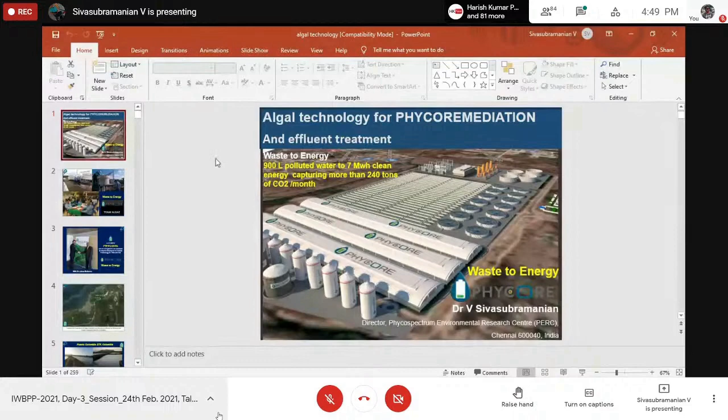We have very recently registered this company, Phycore. PHY refers to Phycospectrum, Chennai, and core refers to Core Biotech, his company, which is a medical company. This man is an MBBS MD in trauma care.

So he has now become an algologist. He is going to submit his PhD in algae from Bogota University within a couple of months, within a month.

The next slide shows a small city called Puerto Colombia, and this is the Caribbean Sea. This connects to Barranquilla, and this goes to Cartagena.

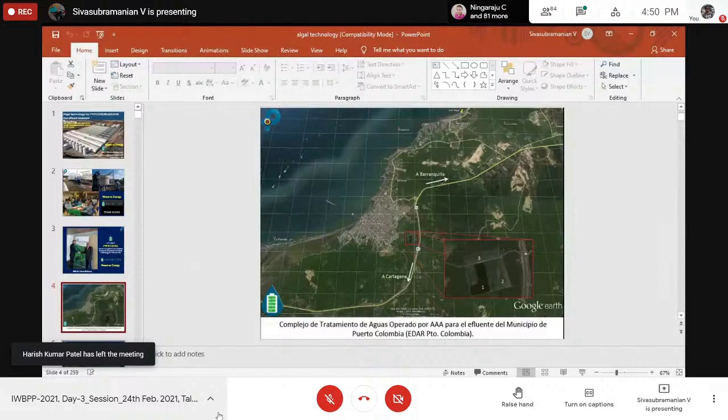We see here a small, enlarged sewage treatment plant that has been given to us. We have started studying the sewage treatment plant, which is not working properly. There are 3 big tanks.

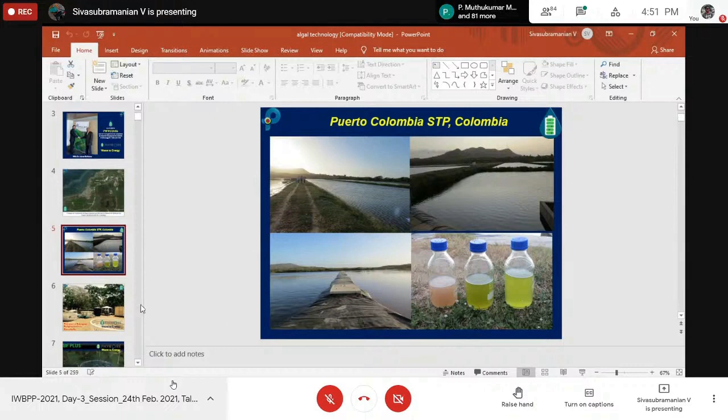If you see the samples collected from the 3 big tanks, they look different because of the algae composition - somewhat reddish and pinkish, dark green, and bluish green. We are now analyzing the wastewater samples and making a consortium to be used for wastewater treatment, which we will be installing very shortly.

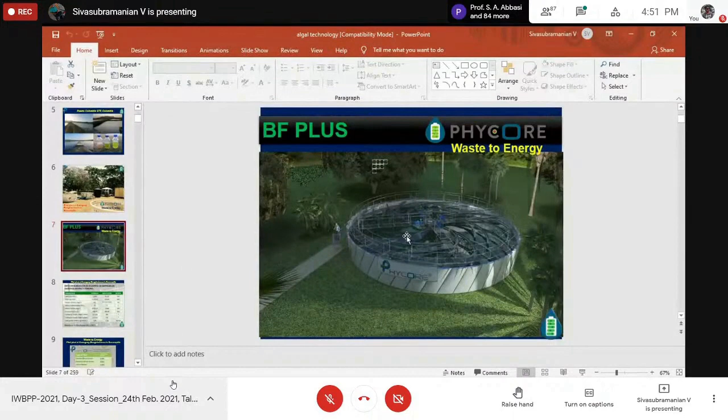This is another project we just completed in a slaughterhouse in Barranquilla, Colombia. Here we see BF Plus, our new treatment facility, or treatment chamber, which we have patented in Colombia. The enlarged version shown here has about 200,000 liters capacity, and we use it to clean the water and also produce biomass, which has a higher calorific value.

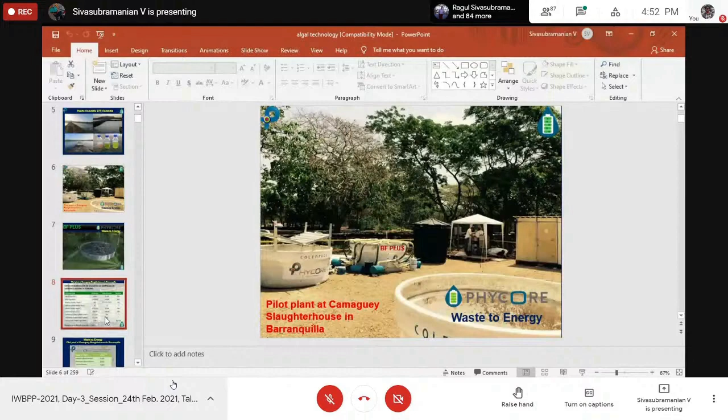In the next slide, you can see that brown coal has about 3.5 kilocalories of calorific value, while the effluent-grown biomass has about 3.8. That means the effluent-grown biomass has a higher calorific value than the brown coal we analyzed in Colombia.

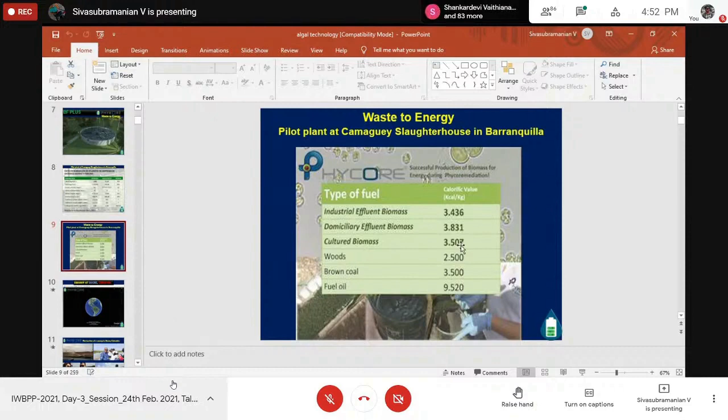Very recently, just before the COVID shutdown, I was in Colombia, and I reached Chennai in the second week of March. Within a week we shut down completely for COVID, but during February and March I was traveling in Colombia.

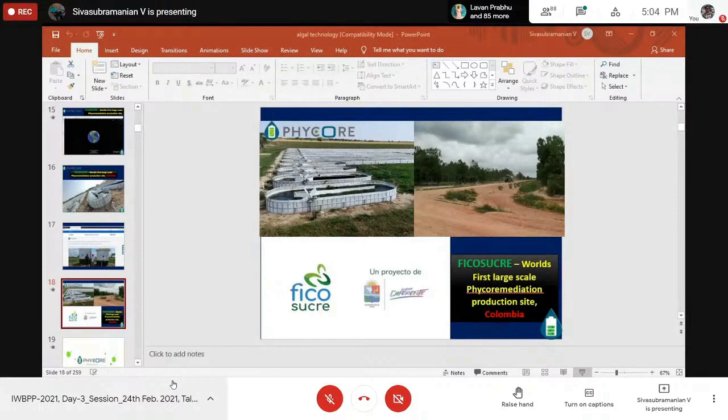And I think right now they may have more cultures than this. And this is another award that we recently received.

I think during August 22nd, 2020, we were sitting in our homes for Corona. So we received online this award, called the Latin American Green Awards 2020, for a project in Sucre, Ficosucre. So we are the winners. In fact, there are about 25 Latin American countries, about 2,000 registrants, and more than 4,000 projects submitted, and we got the award.

So when we got the award, a lot of people started visiting us, like the government people, including mayors and governors. I think last November, one of the governors wanted to meet me, but I couldn't travel to Colombia because of the COVID situation. I think even now the flights are not running.

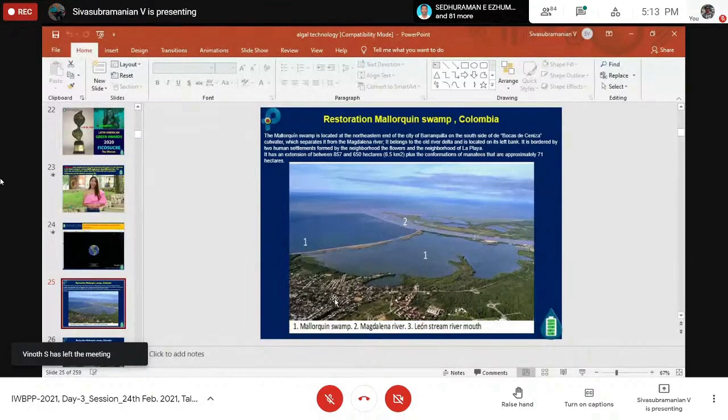And this is another project that we have done in Colombia for the restoration of the swamp. This is the swamp, and number 2 is the Magdalena River that goes into the Caribbean Sea. So the Caribbean Sea, the river, and this swamp. And this is a city, and they want to develop it into a tourist spot. We have done initial studies and also restoration of this big swamp.

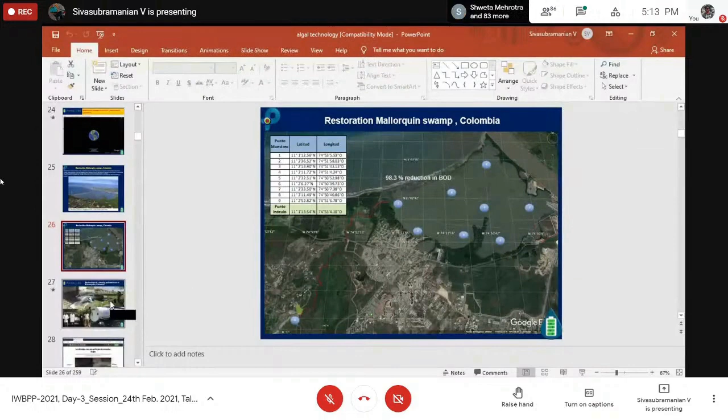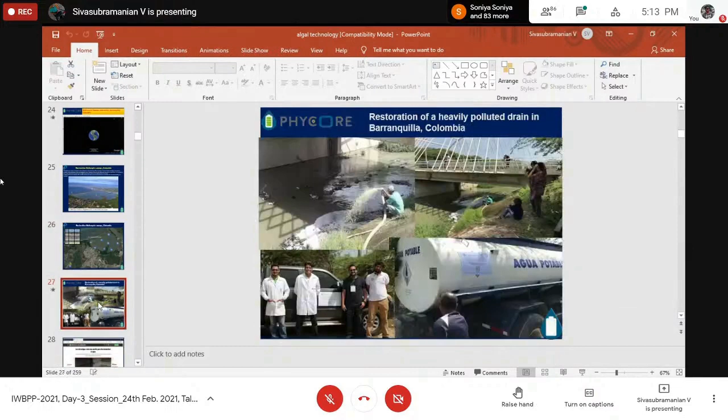You can see here 98.3% reduction in BOD achieved in various spots. We have also treated some of the polluted streams which actually go and dump the wastewater into this Mallorquin swamp. So we have started cleaning that also with our technology.

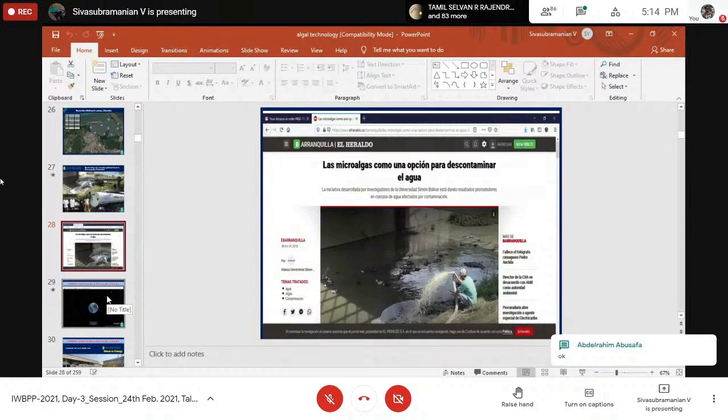And that has actually come in the newspaper. El Heraldo is a major newspaper, like Times Now or Times of India in Colombia. El Heraldo is a big newspaper, and they have put up a news item with maps here about treating the waterway that goes into the Mallorquin swamp.

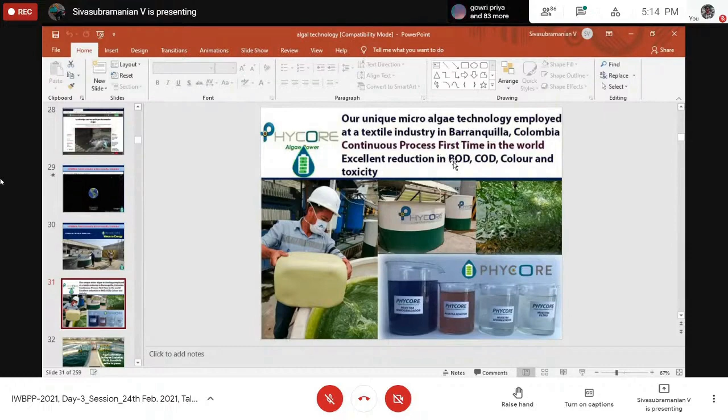So this is another visit I made in Barranquilla. We are doing a project with the Canon textile industry where we put up our pilot there. And the most important thing about the pilot is that it's a continuous process. Normally we do a semi-continuous process, where the effluent... but here it's a continuous process for the first time in the world. And we got excellent reduction in BOD, COD, color, and toxicity.

Skip some of the slides. Yesterday, Dr. Tojin was talking about our Indo-UK project. So whenever we visited, I think 2 times we visited the UK, Plymouth, and then we went to Swansea University and all that. Whenever we go there, we always ask these people to arrange for an industrial visit, because I'm interested in more than a lab, in visiting industry.

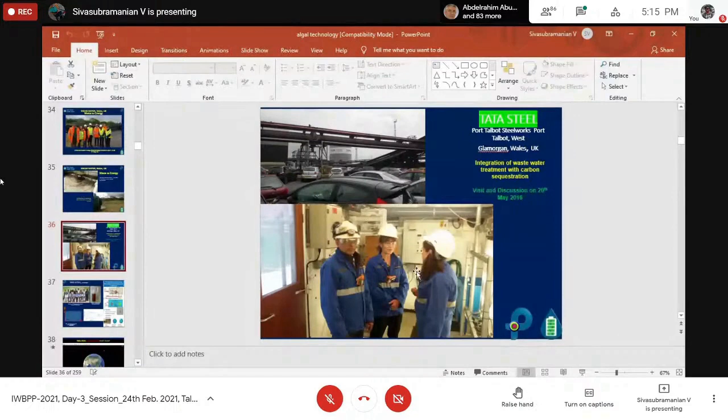And we also visited Tata Steel in the Wales area. I think these 2 ladies who belong to the university, Carol and Dr. Alan, they have put up a big facility for treating carbon dioxide, a flue gas mitigation facility. And we want to put up a facility for treating wastewater there.

So whenever I returned from the UK, within a month, I got a phone call from Tata Steel Jamshedpur. He called me and said, we have a problem with the biological treatment system that was installed in 1972 or 1974, I think. I think they have a problem with color, cyanide, and ammonia removal.

So this is the laboratory treatment we did with the sample obtained from the steel plant, after the initial discussion and final agreement. And you can see within 4 hours, we are able to remove the phenols so that the color is gone, and also able to reduce the cyanide and ammonia to a very low level.

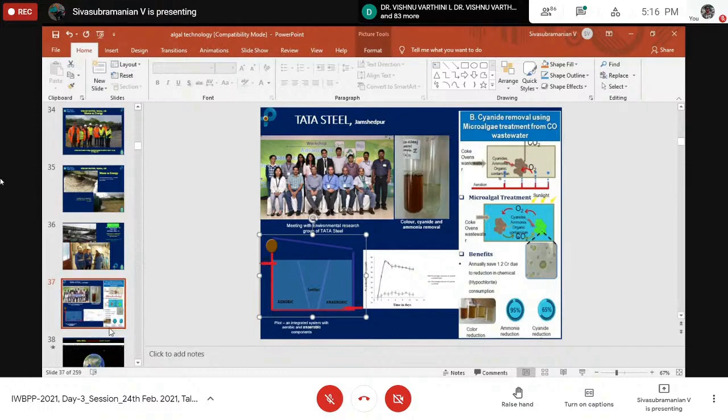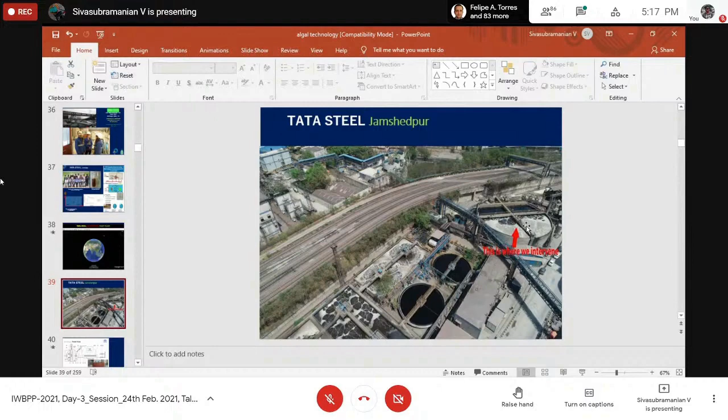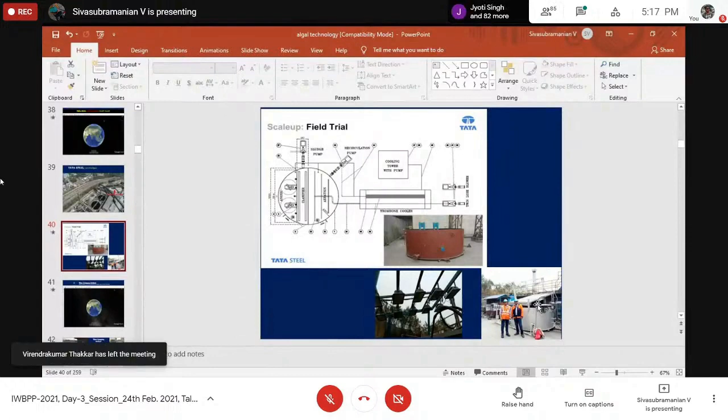We actually added algae along with the bacteria, and that was working very well. We put up a small pilot plant of 8,000 liters. The bigger plant you see here has been reduced to a very small system with all the fittings and pumps and facilities. We also put up LED lamps. This project was complete, and we are now waiting for scaling up.

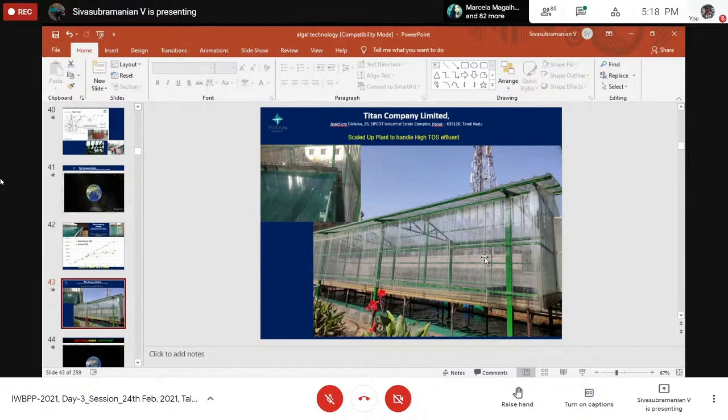This is another 10-ton plant. We have scaled up the plant to handle electroplating wastewater that has about 58,000 TDS. It's very high. When the treatment plant goes up to 65,000 TDS, it brings up color and TDS, and then we evaporate the water without full treatment, ending up in sludge. We put up a huge facility where we are actually treating the wastewater and also evaporating it without sludge formation.

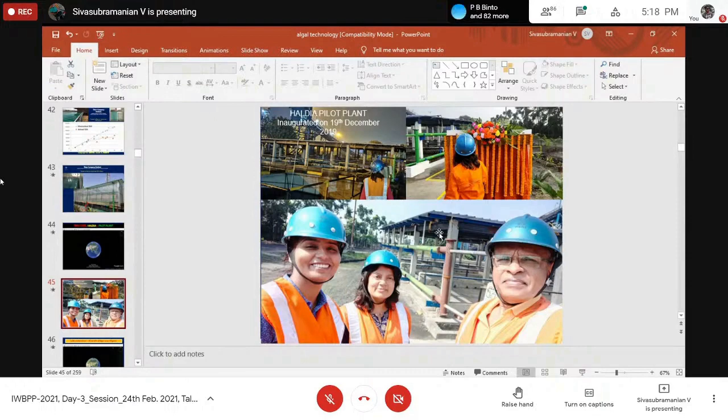A similar facility has been put up in Haldia in West Bengal. Very recently, on 19 December 2019, we put up a 3,000-liter facility there for treating the reject wastewater produced by the Tata Steel facility there.

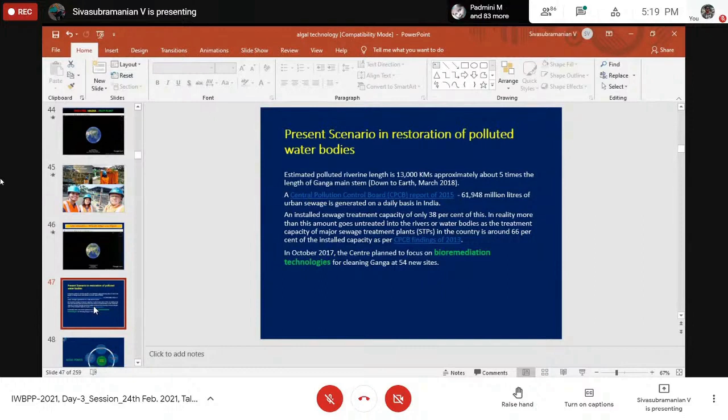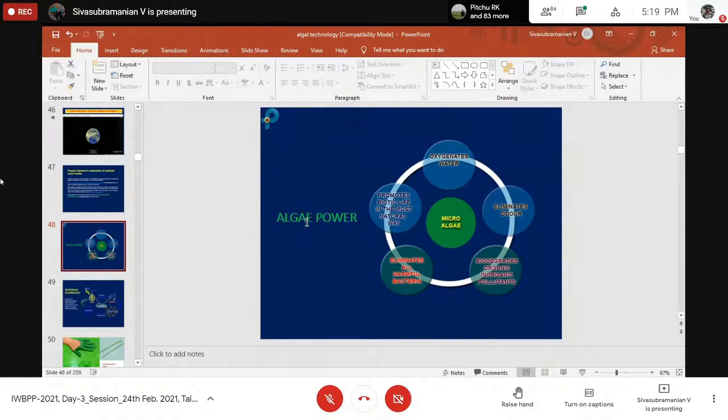Lake restoration is a major project that we have started in India and also in Colombia, where we use algae and the power of algae. I don't want to go into detail, but we have a product called Phycoplus, we call it Phycoplus technology.

Phycoplus is a mixture of organically derived nanotech based micronutrients, trace elements, growth factors, and enzymes. This is added in very small quantities to enhance the growth of algae, which captures light and does photosynthesis, takes care of the nutrients, and releases oxygen. Oxygen is used by aerobic bacteria that act on the organic load and mineralize it, and the minerals are again taken up by the algae.

This helps in faster remediation of polluted lakes, ponds, rivers, and streams. Normally this happens in any water body, but by including Phycoplus, our product, you can enhance the whole process. Instead of taking one month, I think it will take just a week.

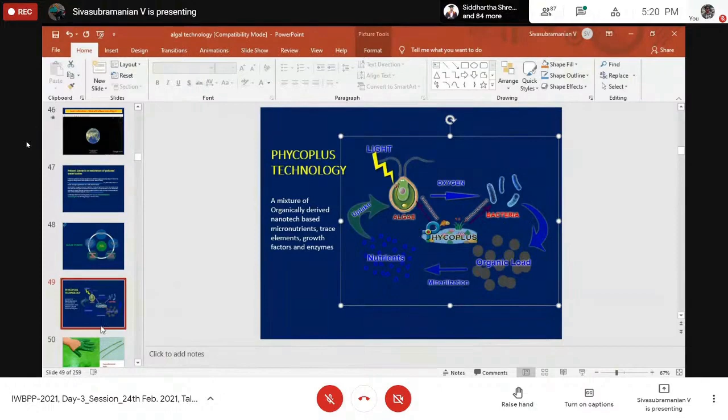This is another project we just started, where we have a problem with cyanobacteria. When we add our product, it interferes because cyanobacteria has the capacity of iron scavenging using siderophores, and iron is taken by the cyanobacteria, meaning it's not available for other algae to grow. Our product interferes with this iron-scavenging siderophore activity, so that the cyanobacteria no longer become dominant and other algae start growing.

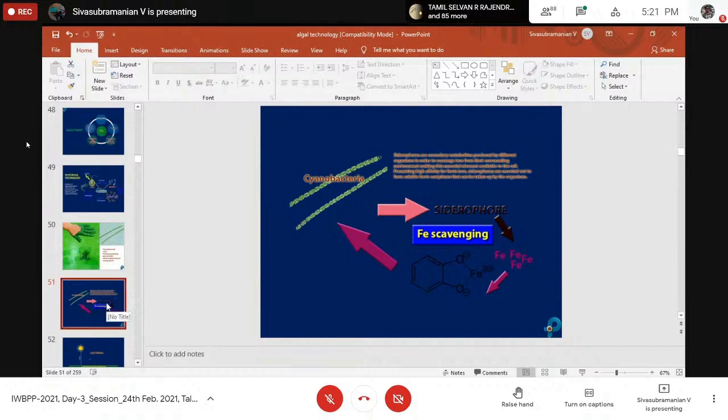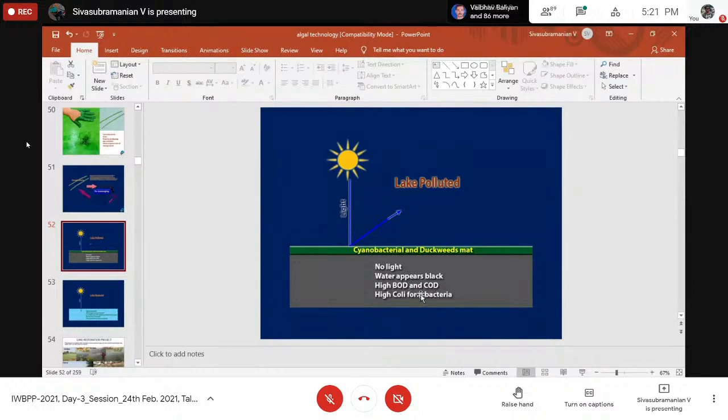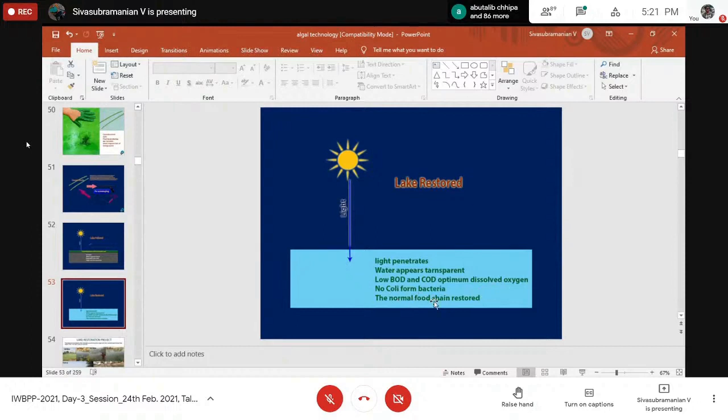Normally in a polluted water body, cyanobacteria advance, completely covering the surface and not allowing light to penetrate. When light is not there, water becomes black with very high COD and BOD, and a lot of coliform bacteria. When we treat the lakes, we remove the cyanobacterial and duckweed mat, so that light penetrates and water appears transparent. COD decreases, dissolved oxygen increases, coliform bacteria is completely removed, and the normal food chain is restored. This is what we do.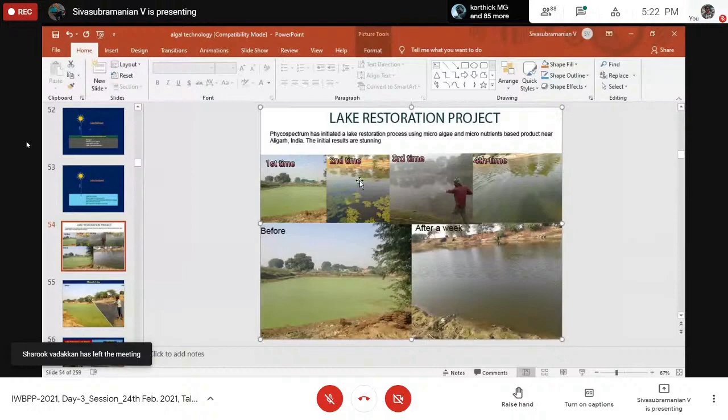We have started restoring lakes, ponds, and rivers in India also. This is the first project we did 2 or 3 years back, a lake near Aligarh, a small village near Aligarh. You can see in the next picture the lake before and after.

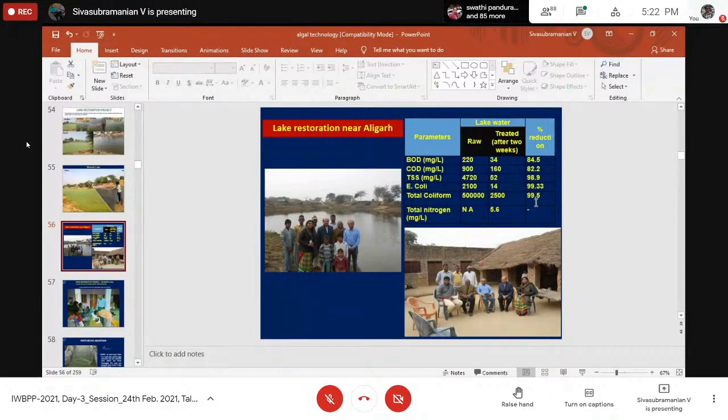You can see it completely covered with algae, cyanobacteria, and weeds. Within a week or so, you can see the complete removal of the covering, so that the water becomes transparent. As the light penetrates, a lot of beneficial algae start growing. You can see the parameters after 2 weeks: BOD and TSS reduced by more than 84 to 98%, E. coli 99% reduction, coliform 99.5% reduction.

This is the starting point of the restoration of wastewater bodies using algae and our phycoremediation. This is another project we did in Jhansi.

Within 2 weeks, we are able to remove and completely clean the water.

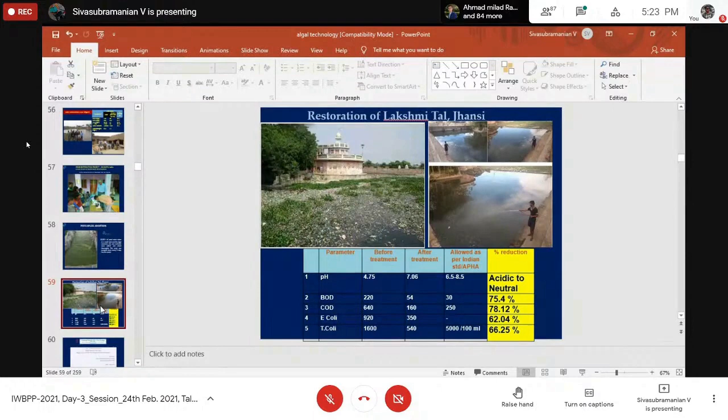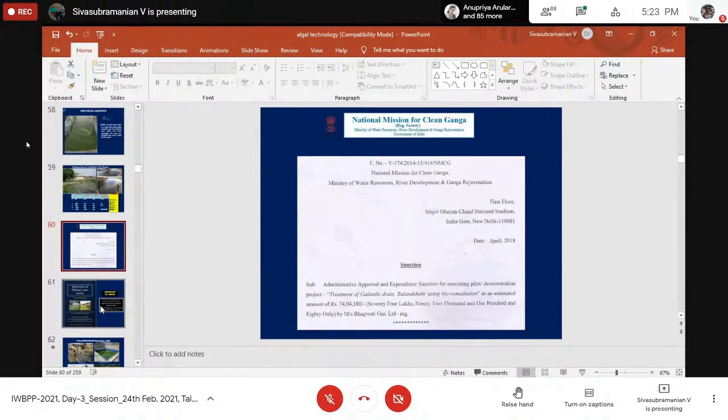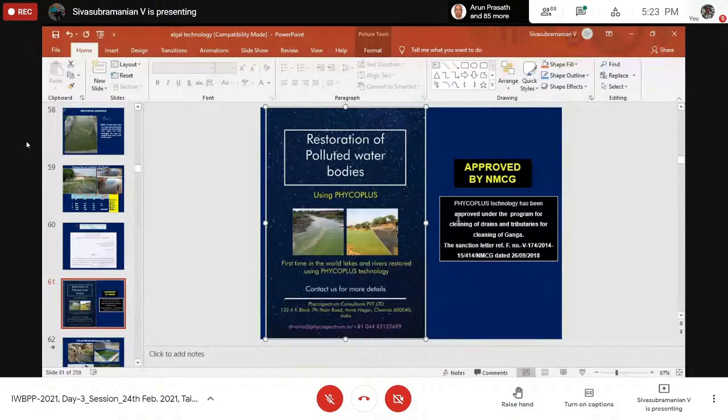National Mission for Clean Ganga gave us a project in April 2018 to restore the Gulaothi drain. This was also approved by NMCG. If you see the NMCG and Central Pollution Board bulletins, they have mentioned our technology called Phycoremediation. So that's a critical success, and this is the project we have done in Gulaothi.

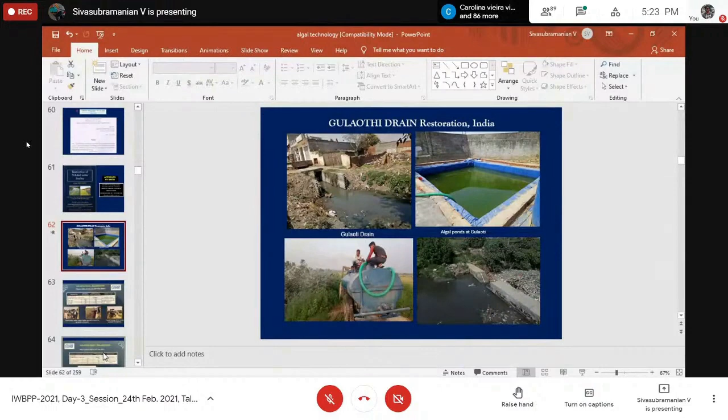Gulaothi actually goes and joins a river called Black River or Kali Nadi. Kali Nadi goes for 135 to 145 kilometers and joins the Ganga. This is one of the projects we undertook 2 or 3 years back.

This is another project we have done in Bulandshahr, and this is a project we completed restoring a polluted water body, I think in Bihar, where fish were dying because of pollution and the absence of oxygen. Within 15 days, we were able to remove the pollutants and make the water transparent. Fish stopped dying, dissolved oxygen raised up to 5.5, and pH raised to 7 from 4. The algal bloom was completely cleared.

This is another project we did in Sitamarhi, Bihar, and these are the pictures of the project. Very recently, I can conclude with this.

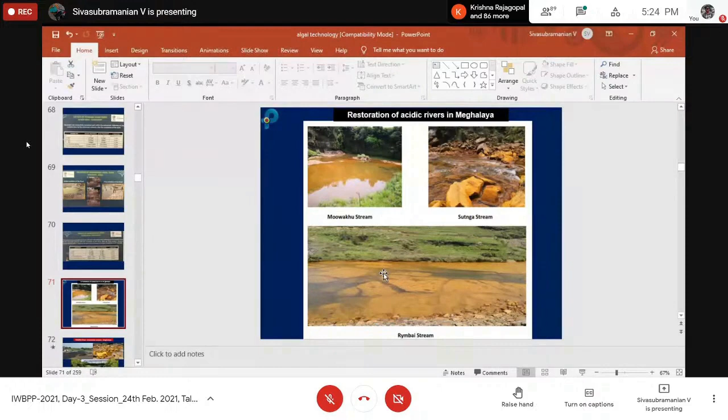Very recently, the Meghalaya government gave us a project to restore a polluted river. There are about 3 major rivers in Meghalaya which have become acidic because of coal mining activity going on there. Suppose you have land, you can mine coal, and during coal mining a lot of sulfuric acid enters the river in several locations. You can see sulfur-coated rocks, and the water becomes transparent because the pH is around 2.5 to 3.5, and nothing grows.

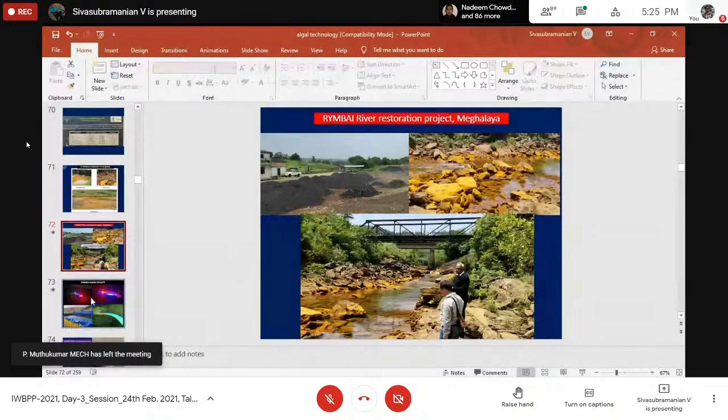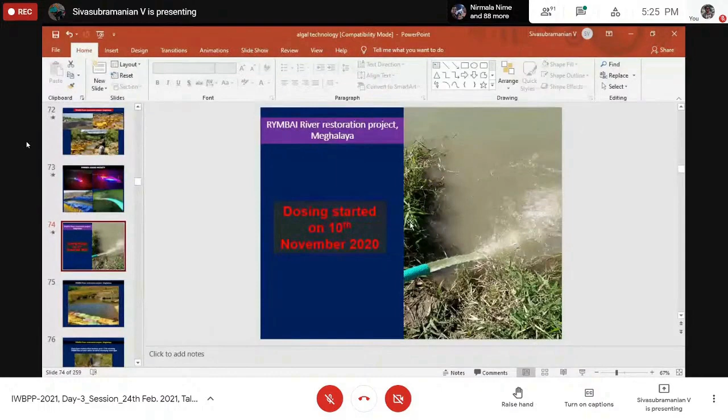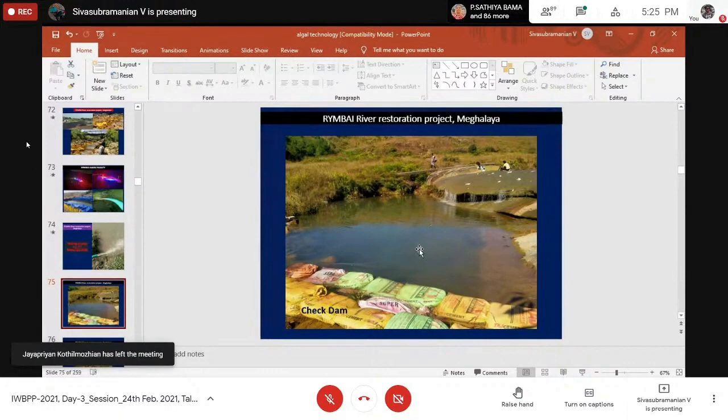So this project has been given to us. We have put up a huge media facility there with LED lights and all that, cleaning up rim by rim. We just started on November 10th, restoring the river. We put up check dams to keep the water stagnant in a few places, so that when we remove algae there, it starts correcting the pH. We have started correcting the pH from 3 to 7 using the check dams.

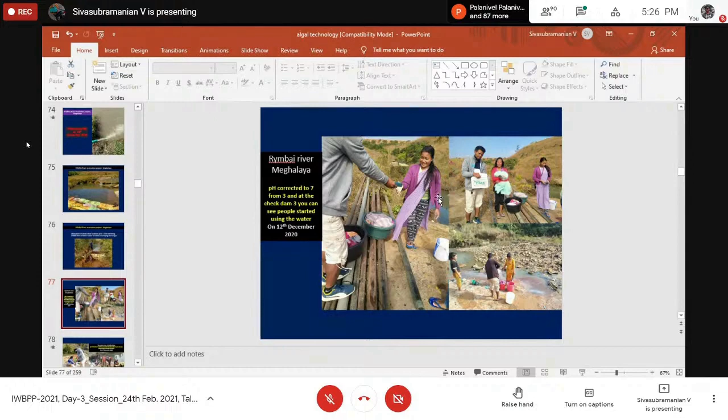On 12th December, this picture was taken, showing the local people before we started restoring. Nobody was coming near the river because it was acidic. Now people have started washing their clothes there. We are supplying them with detergents, with the idea that the detergent will help correct the pH further down the waterway.

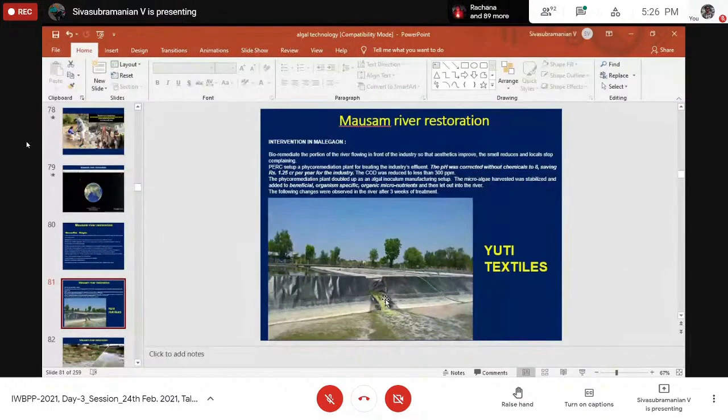We have also done another river restoration project. We signed an agreement with a textile industry that was dumping waste into the river. We treat the textile waste, and then the treated water, along with a lot of algae, is thrown into the river. You can see the results we got.

The upper table shows values before starting treatment, and the lower one after starting treatment, at Dyane, Mausam, and Chandanpuri. Dyane is the zero point. Chandanpuri is about 10 kilometers away from the industry where we do the treatment. After Chandanpuri it joins the big river, so we don't need to go beyond that point, which is after the 10th kilometer.

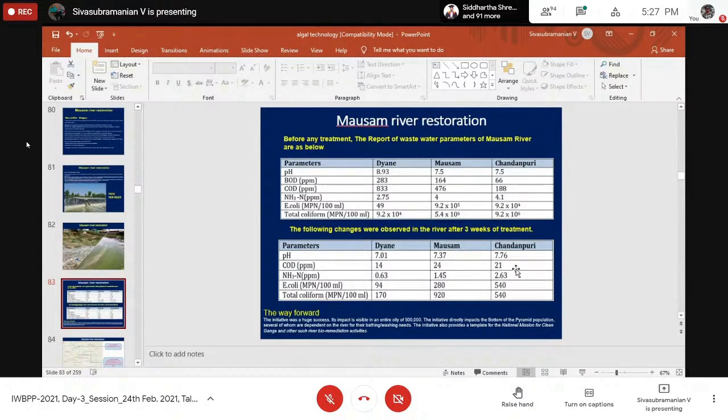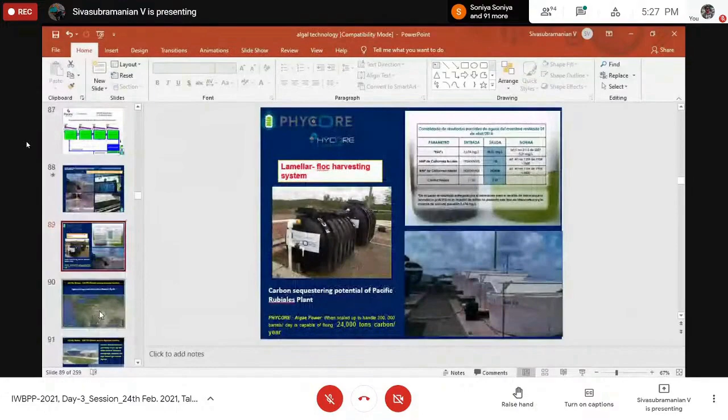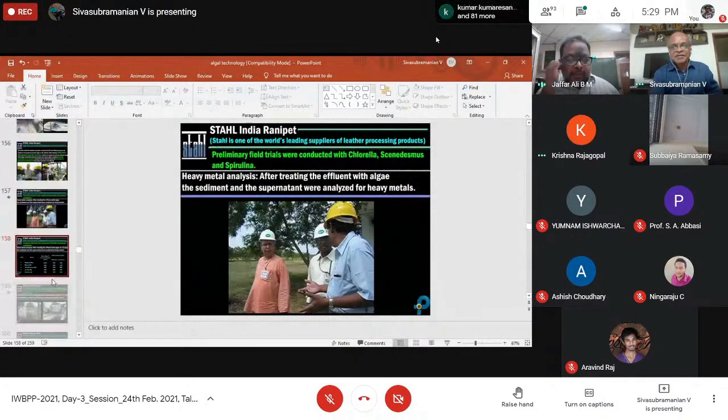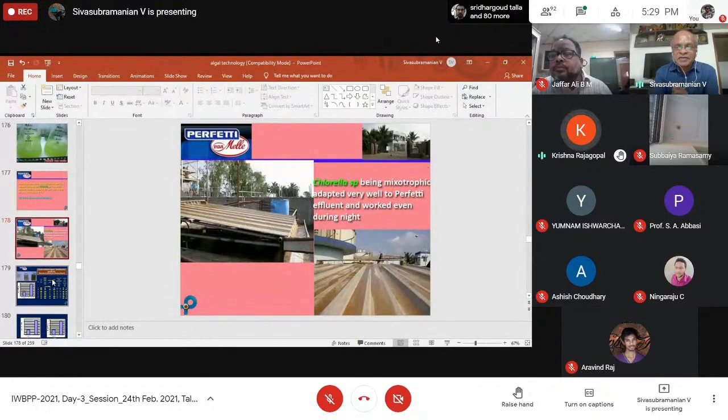Any clarification questions? Please come in. Can I ask a question? Yes sir, please go ahead. Good evening, Dr. Sivasubramanian. Very good talk, and congratulations on taking the risk in places like Colombia with all their social and security problems. I lived a long time in Latin America.

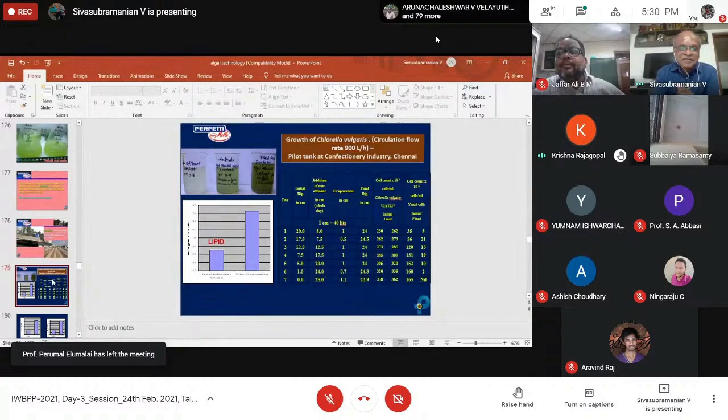My question is related to drinking water. We have our city of Rio de Janeiro, which has treated algae that produces a compound called geosmin. Geosmin has a strong smell, and people don't like it. Some people even say it causes health problems like diarrhea. How do you avoid this production of geosmin by algae?

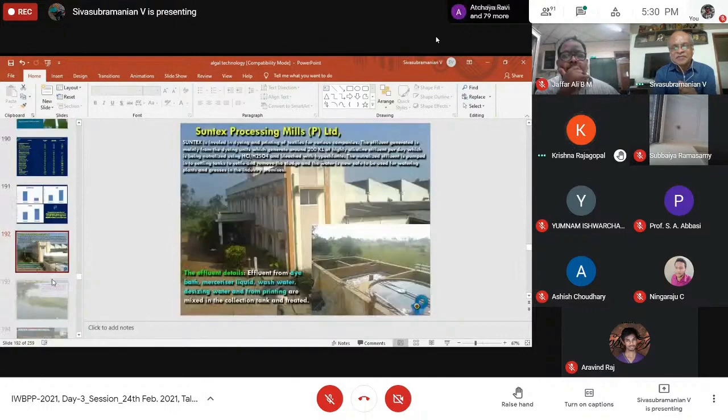Geosmin is the compound I suppose you mean. If not, I can tell you it's an aromatic compound with two benzene rings with OH and CH3 groups. It's a well-known compound produced by algae. I think it's basically due to some contamination with sewage water.

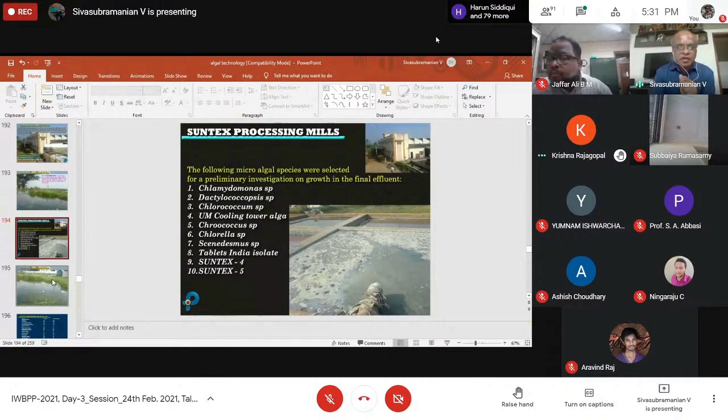Actually, we don't directly deal with drinking water. Whatever we are doing is only wastewater, from industries and also from sewage. I haven't heard of this problem in Colombia as such. Probably in drinking water there may be a problem, but we don't deal with drinking water. We deal with already polluted water bodies. I will try to search the literature on what you're saying and learn about it myself - it's a very interesting question. Although we don't touch drinking water, drinking water eventually becomes wastewater later, right?

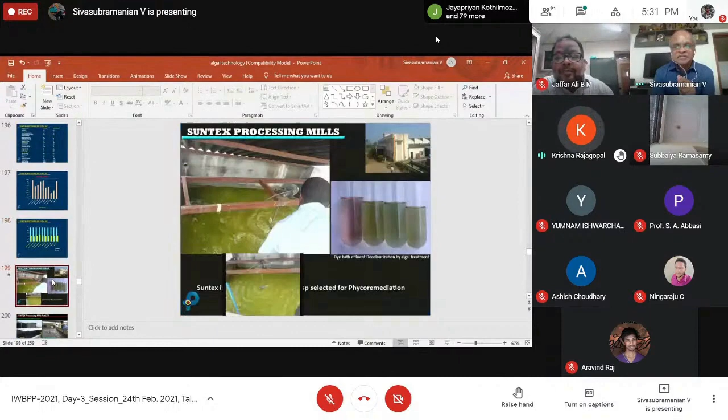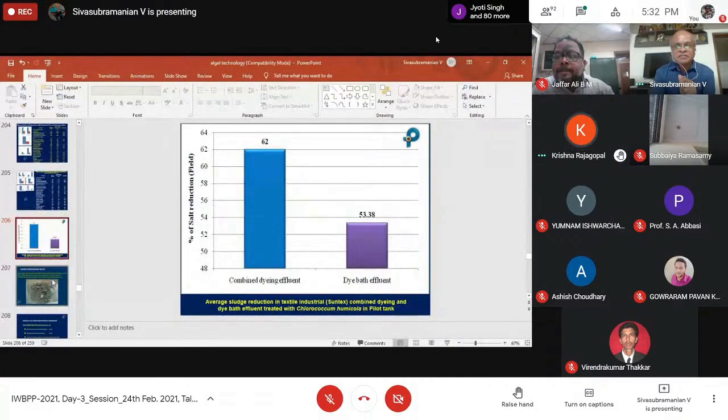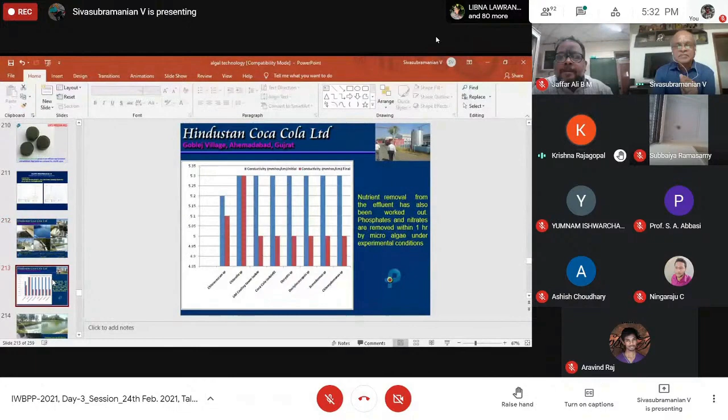Can I ask one more question? Yes sir, please. This is about wastewater treatment only. You talked about BOD and COD going down. In flowing water, how far downstream do you measure this? Because at the point of treatment COD and BOD may be low, but as it flows and reacts, the oxygen gets diminished and it may grow again. For example, in the Tennessee Valley River, beyond your district or municipality this may happen, not at the point of treatment. How far downstream do you test the COD and BOD in flowing systems?

Actually, the flowing systems I've been showing are all drains, small drains that connect to big rivers. We haven't touched the big rivers so far, because the big rivers are polluted by these small wastewater streams. So if you clean the wastewater stream, the big river becomes okay. That's the idea behind the restoration of the Ganges that we are now talking about. In the Ganges itself you cannot do anything - it's like an ocean. But you can control and treat all the sewage, nalas, and other waterways that dump into the rivers, which finally end up in the Ganges.

So that is what the project is all about. We have been given a nala in Gulaothi, UP, which joins with a big river called Kali Nadi. That river travels about 135 to 140 kilometers winding, and finally ends up in the Ganges. So that is the idea - we don't want to jump into big rivers, which is very difficult. The products and treatment system we are talking about work very well with shallow, slow-moving polluted streams, which are much easier to manage than the big rivers.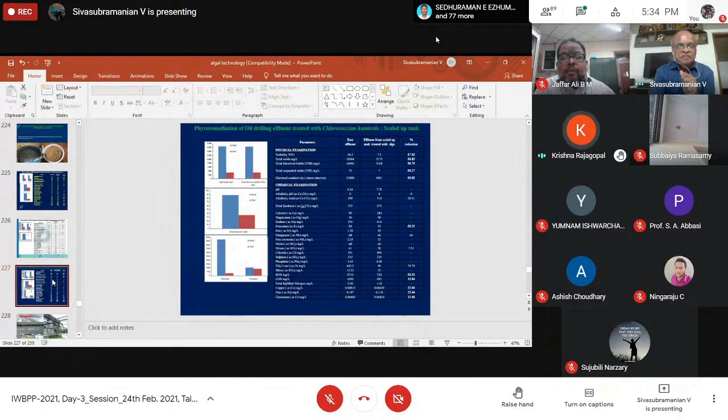Thank you very much for your interesting talk, and thank you for your ventures. Hopefully you venture into Brazil also. Yeah, we are actually talking to Chile and other countries - Latin America we have covered. I think yes, we will be traveling definitely, only the coronavirus has stopped us. I would have visited Colombia at least twice during this corona period, but could not go. I have gone to Colombia several times for other purposes.

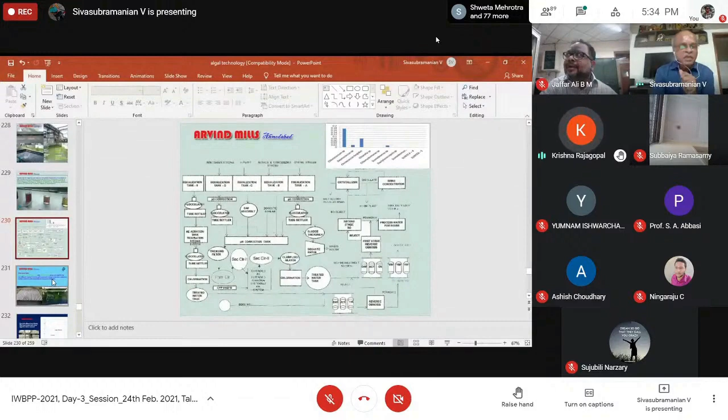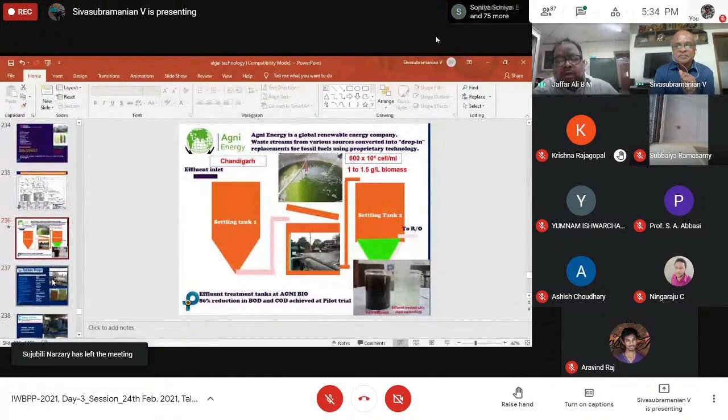Okay, thank you. One quick clarification, Professor - when you have this algal bloom, there's muddy greenish water, and you bring clarity by treatment. What exactly happens? Are you adding algae to clear the wild algae there, or what exactly is the transformation? It's a very good question. In fact, it varies. Supposing it is wastewater, polluted water with a lot of algae...

Basically, we divide algae into two groups: beneficial and harmful. So when the harmful algae grows, that is pollution. When the beneficial algae grows, that is not pollution.

So what we do, in Colombia for example, is use reservoir ponds where we grow selected species of algae which are not growing in large numbers in those polluted water bodies because other cyanobacteria and harmful algae are dominating. We collect those species, selecting only the very slow growing or not growing at all, the so-called beneficial algae, bring them to our facility, give them a lot of nutrients, grow them in large numbers, then put them back into the water body so the number increases, competition increases, and the harmful bacteria and harmful algae are completely removed by the increasing number of beneficial algae.

That's what we do in treatment. So it is a natural system we are talking about. We don't add any chemicals or anything.

The clear water represents beneficial algae water, because we actually restore the ecosystem. If there are harmful algae, it will kill the ecosystem - fish will be killed, the water will be colored and covered, and light may not penetrate. So we make the system completely natural with all the food chain partners, including primary producers, secondary producers, consumers, everything. We don't add chemicals, but we increase the beneficial algae by bringing them to a growth facility, growing them in large numbers, and putting them back in the water body so that they immediately flourish.

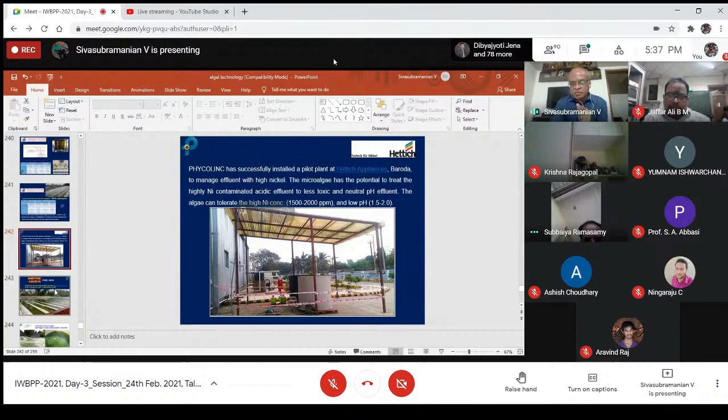So when we add this nutrient, we add it on the surface. We don't mix it into the pond, river, or water - we add it on the surface, not for rivers, but for ponds and lakes we add it on the surface. When it starts dissolving, it takes action. That's why a very small quantity actually activates the bacterial and algal treatment system in the polluted water body. Whatever we would normally achieve in a month, we can achieve within a week. So it enhances the natural degradation process through these nutrients, growth factors, and we also add some growth hormones.

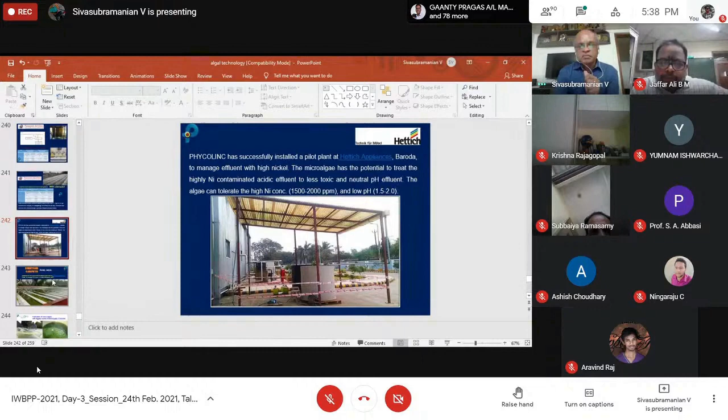Any other questions from the audience? So I have a question. Yes. May I go ahead? Yes, please. You are very clear, don't worry.

So it's about the continuous reactors that you have - what is the hydraulic retention time or the organic loading rates you employ in those continuous reactors? Actually, I showed a continuous reactor, but otherwise we'll be doing semi-continuous loading. We normally maintain, I don't know how far you're going to say, a 1:4 ratio.

One part that we will be adding, and 4 parts that will be remaining there in the tank always with the algae and all that. So 1 part we will be adding and removing every day. Sometimes if it is acidic, we go for a 1:8 ratio, with addition and removal every day. It is a semi-continuous process and that works.

Actually, I meant the hydraulic retention time or the batch processing time - basically the treatment time. Treatment time is within 24 hours. Sometimes we take every hour also. It depends. So the percentage reduction you mentioned in COD, BOD in some of the reactors?

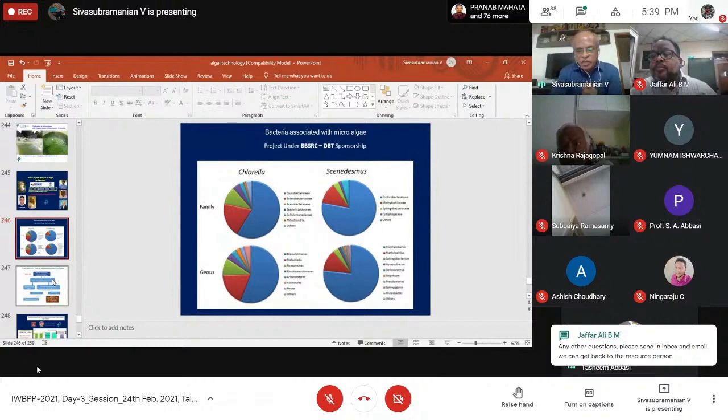Yes, so this is achieved in 24 hours of treatment? Yes, that is why maximum 24 hours - you cannot go beyond 24 hours. But if the percentage reduction is very high, we can remove it even within a few hours also; we don't need to keep it for 24 hours. So we have done it based on the results we get, the efficiency. We don't go beyond 24 hours - that is not allowed, that is the only limitation.

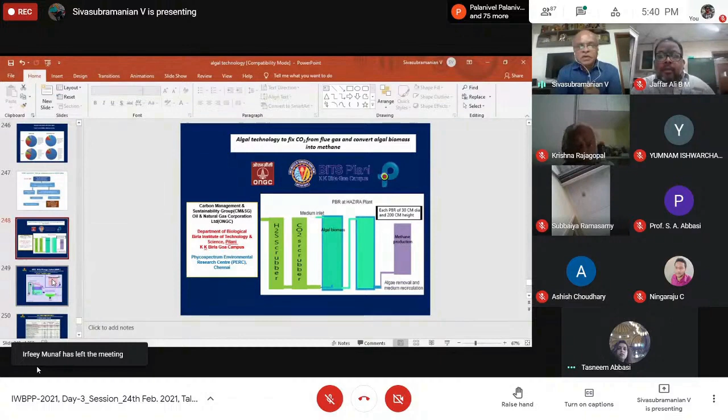Okay, thank you very much. Yes, I think you have passed some technical test, definitely. So that was our colleague, Dr. Tasneem Abbasi from the Pollution Control Department, sir. Oh okay, that's why - I never expected this.